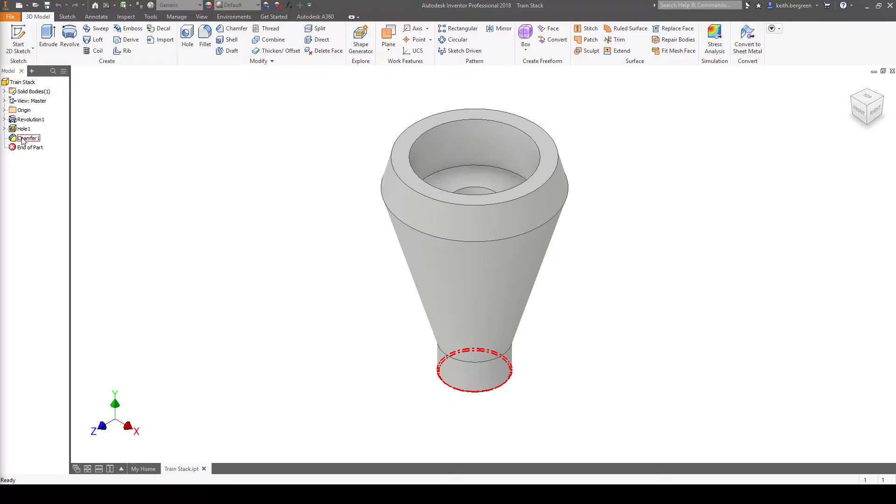Let's start by making a part, creating a sketch, and choosing the XY plane. We're going to be making just half of the part because we're going to use a revolve. Just imagine this hole is not here - we're making this complete outline, just half of the stack, and then revolving it.

Let's start by making a vertical line which will represent the total height of our stack, which is dimensioned at 1.75. So again, total height 1.75.

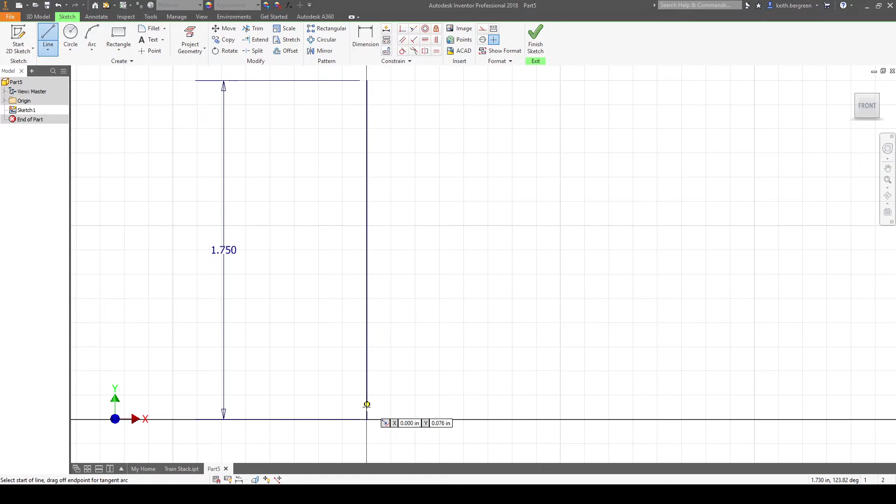Then let's start going across the bottom here. This bottom line is dimensioned with this circle diameter, and since it's dimensioned from the middle out, not the full diameter, we want to use half of this - so 0.25.

Next we'll keep going up along this way, so that is 0.25 going straight up.

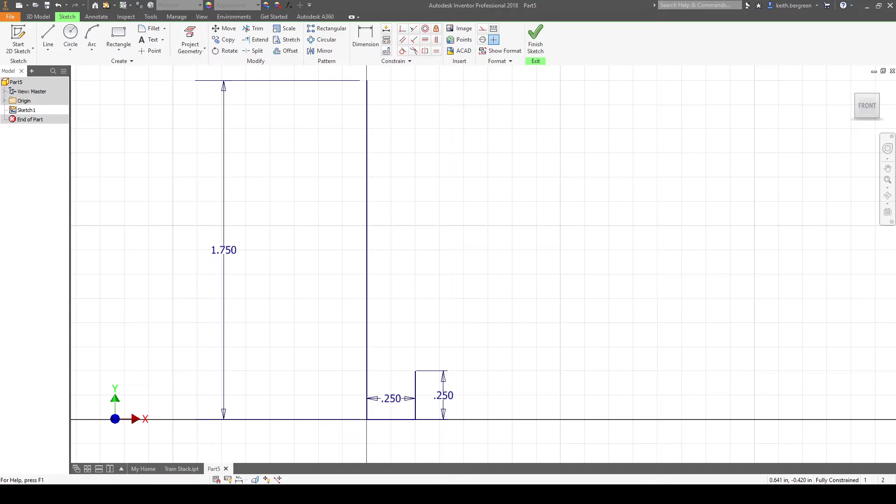Then we have an angled line going out, and you'll notice there's a dimension of 1.5 from the end of that line to the bottom line we added earlier. Go ahead and draw an angled line, place it anywhere for now, then use the dimension tool. Click on the end point of that line, and then the very bottom line, and this is going to be 1.5.

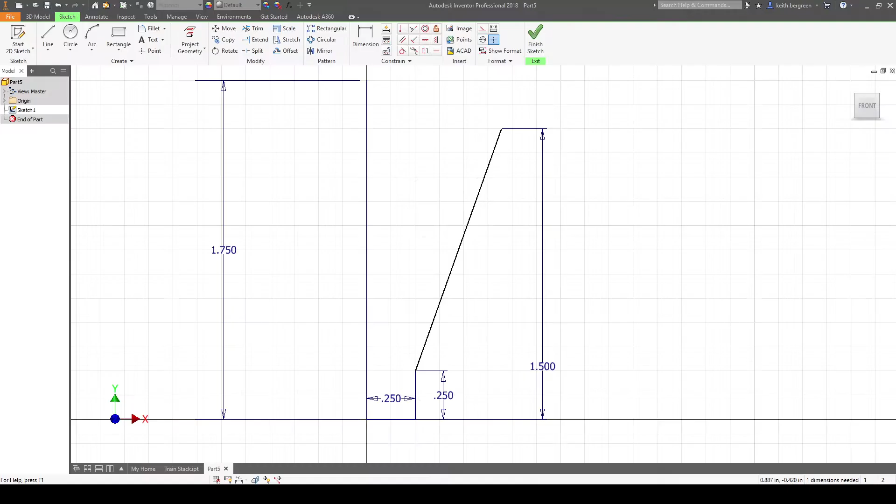Next we're adding the dimension from that end point to the center of the hole, which is given with this diameter again. Like before, we want to dimension just half of this - half of 1.25. Use your dimension tool, click the end of that line, then use the center line, and do 1.25 divided by 2.

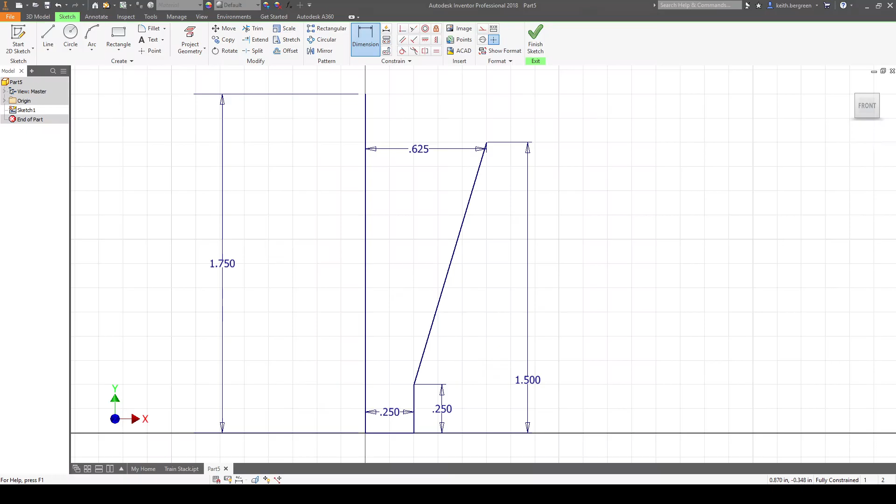Next we're just finishing this off by adding this angled line, and connecting it straight to our center line. Add that angled line, make sure you draw it so you get this dashed line along the top, then just draw a straight horizontal line and connect it.

The last dimension we need is to tell it what angle this angled line is at. If you notice, this is at 15 degrees, so we need to add a vertical line to dimension that 15 degrees from.

I'm going to go to the line tool, and starting at this point, we'll draw a line straight up. Click that - the only purpose this line serves is to dimension this angle to. So we click this line and turn it into a construction line, since it won't actually be used as part of our object.

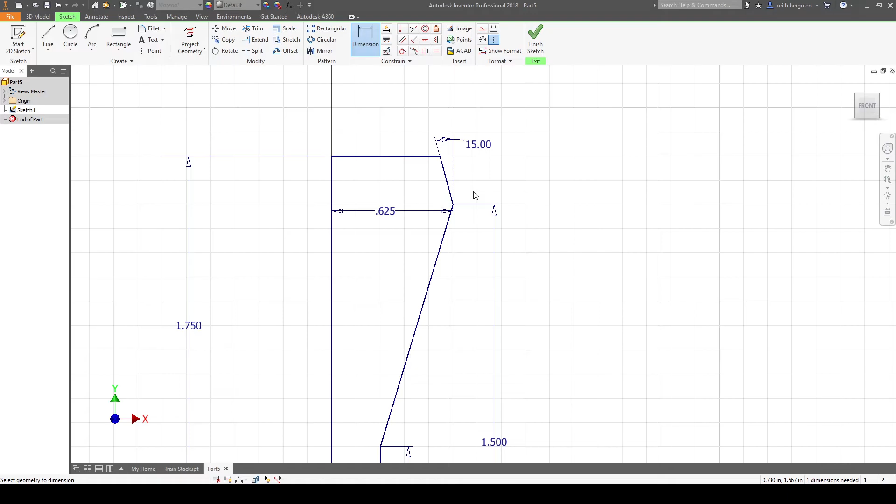Then we click dimension, click our construction line and the angled line, and change this to 15 degrees. That's our sketch for the solid body of our stack. Let's click finish, and then revolve. It should select that profile - click on axis, make sure you click that center line, then click OK. Your stack should look like this for now.

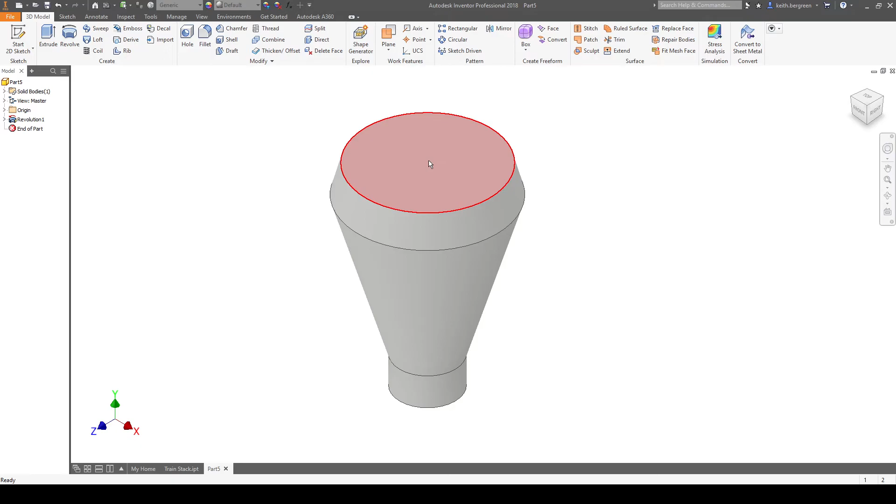What we're going to add next is the hole. Let's add a sketch on the top of the stack, and just add a point in the middle, then finish, and we will use the hole tool to add the hole.

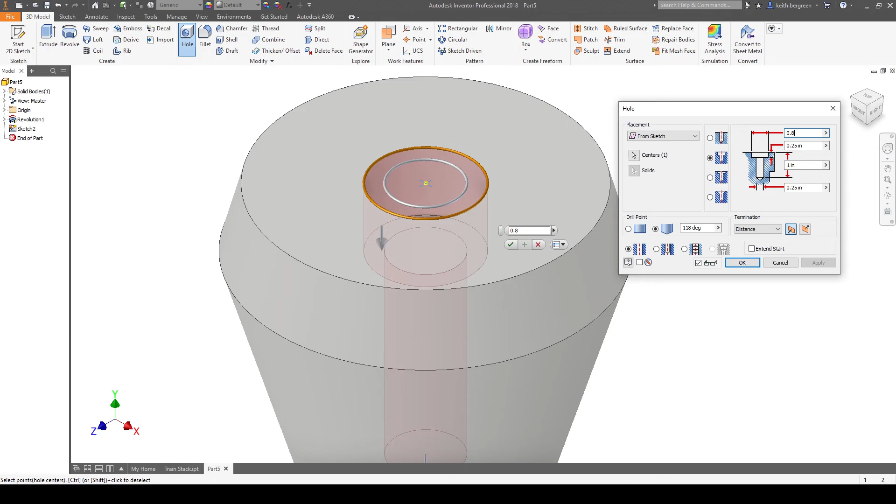That has a diameter of 0.875. We're going to select the counter bore option and change the diameter of the larger part of the hole, the opening, to 0.875. That goes down to a depth of 0.375, so change the depth of that to 0.375. Then the smaller hole has a diameter of 0.375, so change this to 0.375.

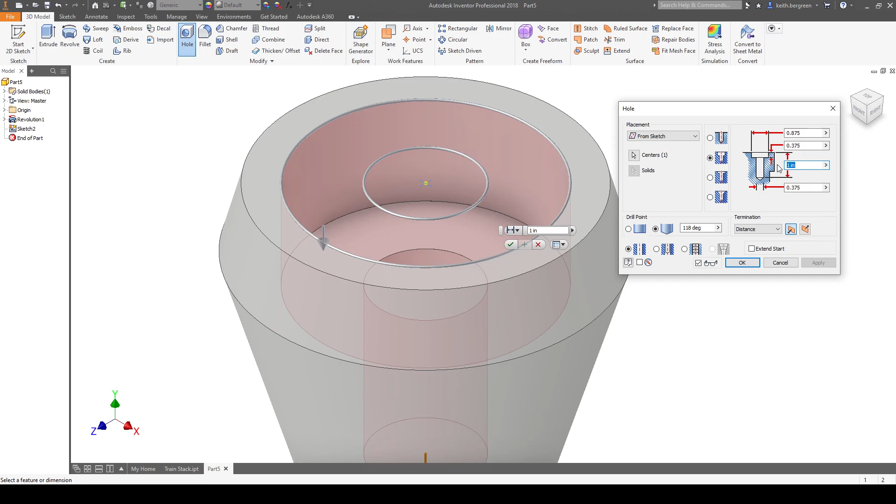And that one goes down to a depth of 1.5, so we're going to change the total depth to 1.5. That's going to finish the hole.

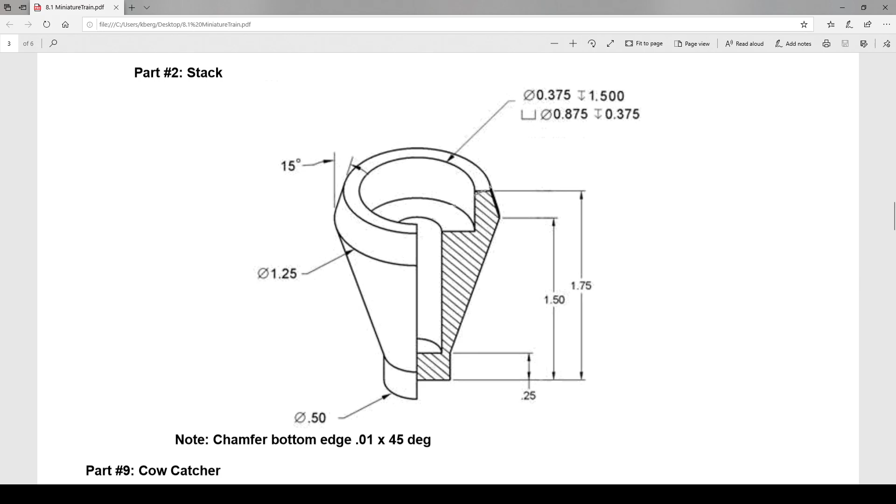Then click OK. The last thing we need to add is the chamfer on this bottom edge. We're just going to click chamfer and change the distance - our drawing tells us that distance is 0.01. We'll change this to that, 0.01, then click on that edge and click apply, and that is the stack.